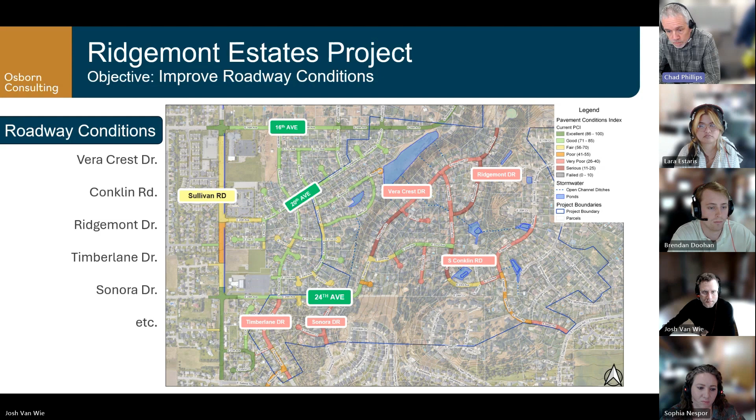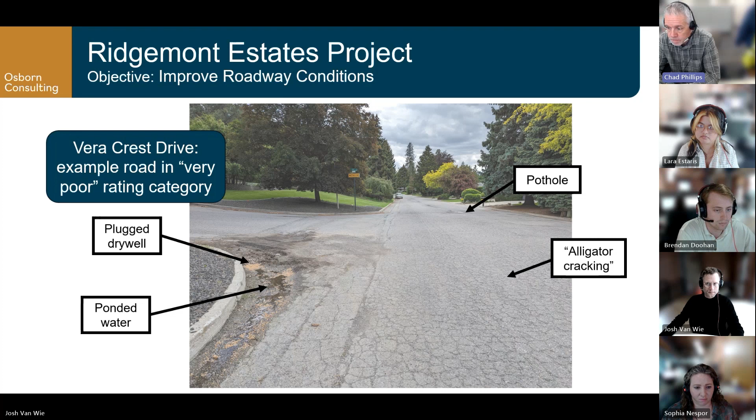So that was the project objective - that was in the past. We are now at the project study, and this is where we have brought in Osborn Consulting to help us out. In this stage of the project, we will be identifying those conditions that are resulting in the failing roadway conditions. Is our groundwater contributing to the roadway conditions? Probably. Is the existing stormwater system contributing to the failing roadway conditions? Maybe. So in the project study stage, we will be identifying existing site conditions.

We will be looking at a geotechnical evaluation to assess the groundwater conditions. We'll be doing public outreach similar to this, and more. We will be doing a hydraulic evaluation to assess the existing stormwater system. Ultimately, we will go through some design alternative development. This stage of the project started in 2023, is currently ongoing, and should be finished in the fall of 2024.

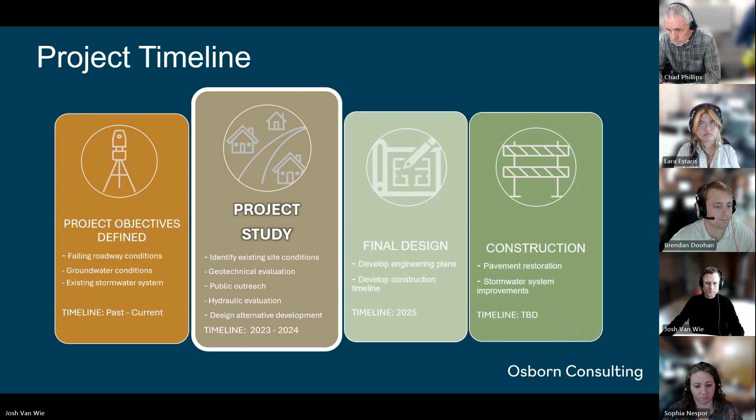Moving ahead in time will be the final design. The city will take the preferred design alternative developed during the project study and develop engineering plans and a construction timeline. Construction will then follow. The timeline for construction has not been determined and is dependent on city council approval and appropriate funding.

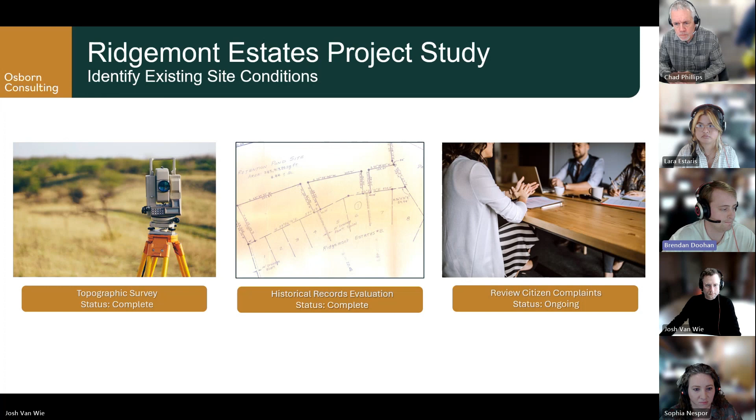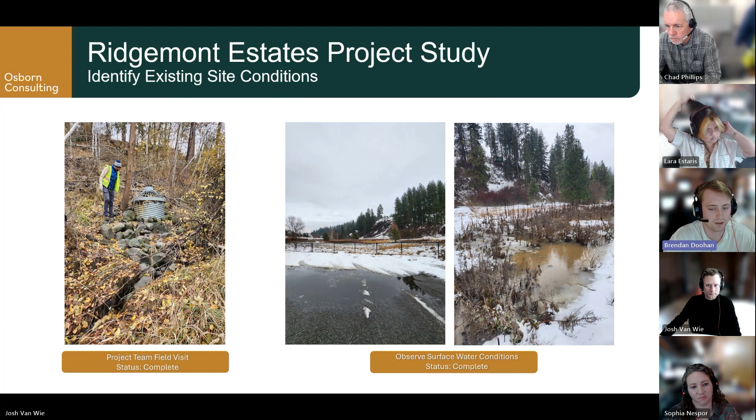Our project team has done a field visit. All parties involved in this project were able to walk the open channel ditches, infiltration ponds, and roadways to get an idea of how the existing system is functioning. We observed surface water conditions by inspecting roadways in the area, providing insight into where stormwater infrastructure may be failing. The team observed how surface water reacts during significant rain and snowfall events.

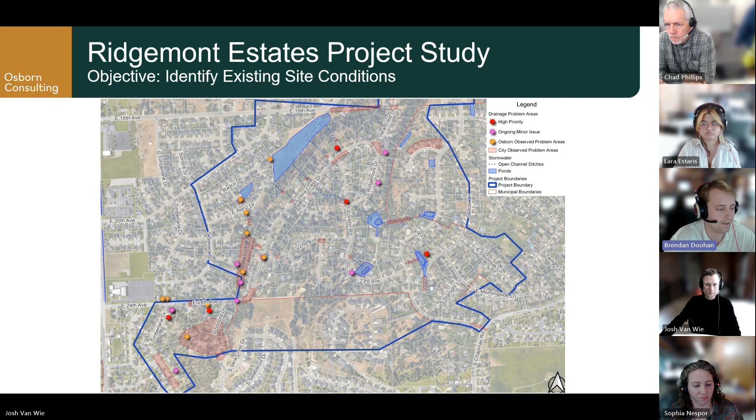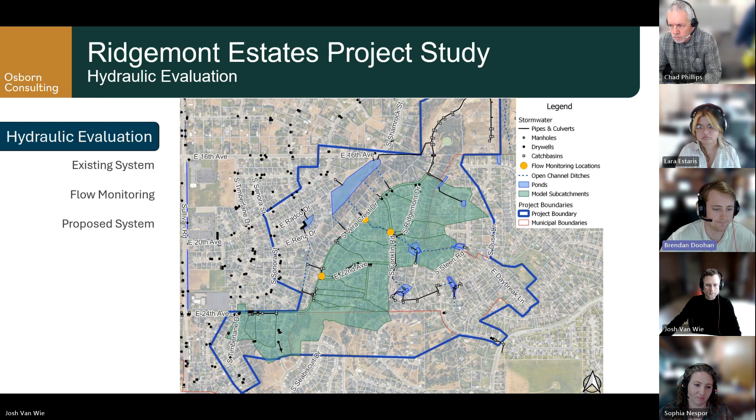We're currently observing the existing system throughout different seasons and storm events, documenting these with various pictures and photos to aid our decisions. The flow monitoring process is also ongoing. By measuring flow through critical drainage pipes, we can observe how various storm events impact flow conditions, helping us accurately size the proposed system. The proposed system design is where we start drafting alternative solutions to improve overall functionality and ensure the new roadway's lifespan. I'll hand it off to Sophia to talk about the geotechnical evaluation.

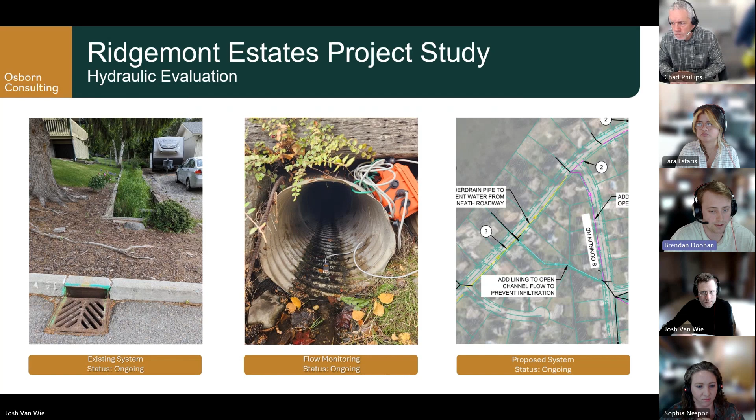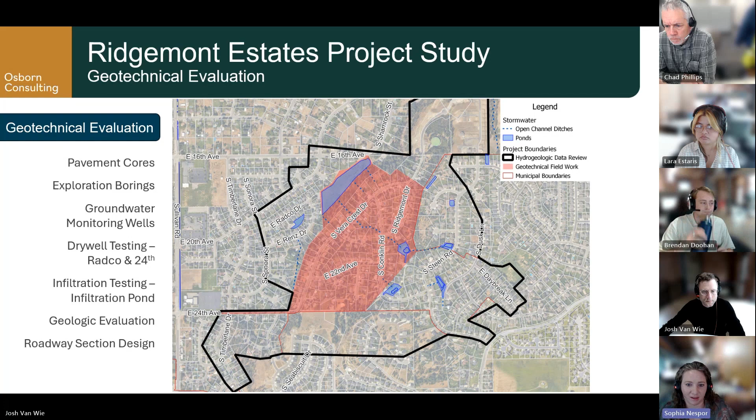Shallow pavement cores were drilled into the existing pavement to evaluate the pavement section and subgrade conditions. Engineers found that much of the pavement sections varied greatly in thickness, and some of the worst spots are in older parts of the roadway where the compacted subgrade and hot mix asphalt layer are very minimal.

Geoengineers have also installed monitoring wells at designated locations to record groundwater levels and temperature during storms and seasonal fluctuations in precipitation. Initial data shows that the groundwater elevation is consistently increasing in response to significant snowmelt events and rainfall events.

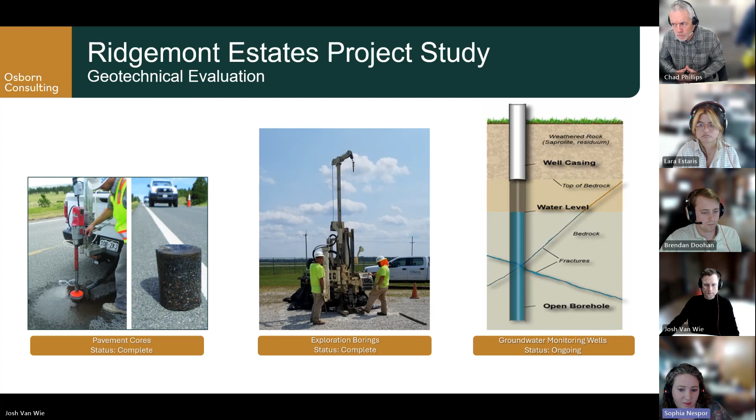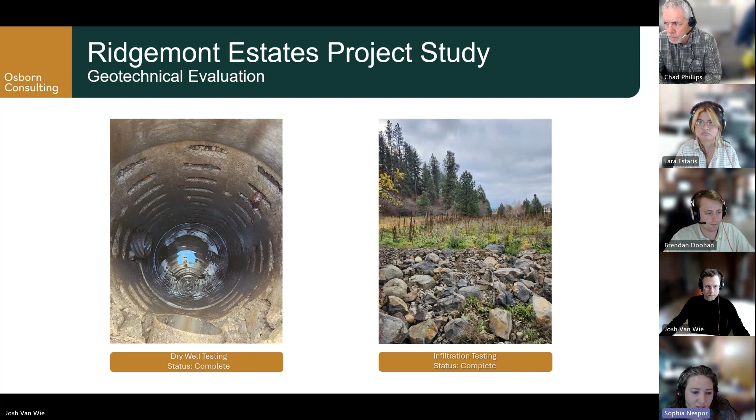Additionally, geoengineers has completed dry well testing and infiltration testing. The dry well testing was done around the Radco Pond and on 24th Avenue, and the infiltration testing was conducted at the large existing pond along 16th Avenue. These tests will help us determine if there's enough capacity in these existing facilities to reroute some of the stormwater away from the project's drainage problem areas.

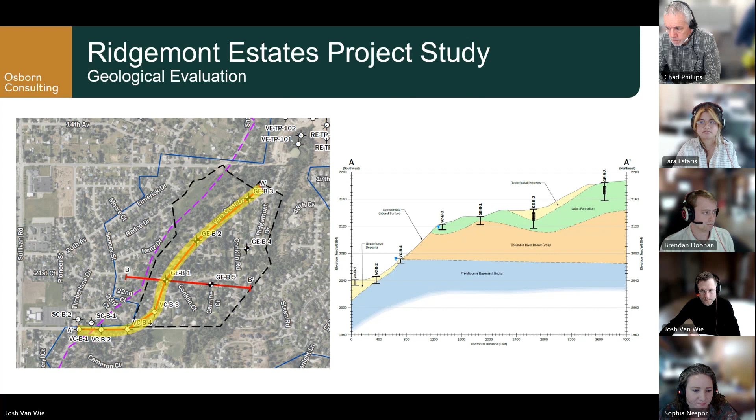I'll talk a little bit about the designs we're developing right now. We're still in the initial phase of developing concept designs. The process works like this: we'll come up with several designs that we think might be viable alternatives, work with the city to refine those, and then get to a point where we select a preferred alternative.

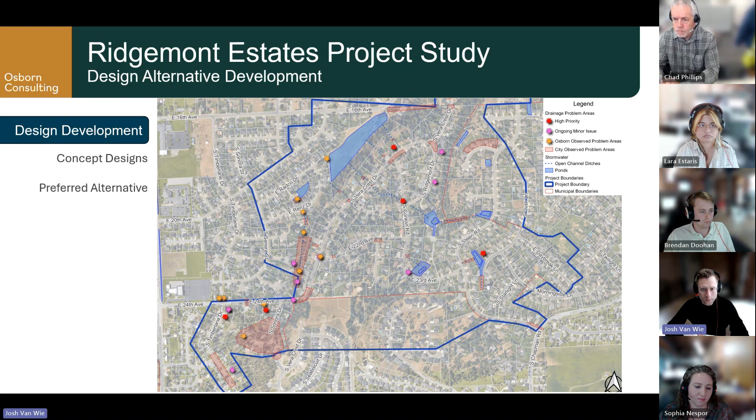For the concept designs, we currently have a few ideas that we're starting to work with. These are all in the initial phases, so these are not necessarily the designs that will move forward for the project.

We have some ideas of different ways to improve the roadway drainage system. We know there are some dry wells that have failed and some other drainage conveyance that's not working properly, so we're going to be looking at those.

There's also a number of open channels that go through the neighborhood, cutting between people's yards. Sometimes through someone's backyard, there will be an open drainage ditch that's conveying flow.

Those are areas where there can be a potential for interaction between the water flowing on the surface and the groundwater, either water seeping into the ground and filling up that bathtub, or water coming back out of the ground and causing extra water to go down through those channels. So that's a big part of what we're looking at.

We expect that there will be some type of new conveyance system, maybe some new storm drains that take flow from some of the problem areas and deliver it to areas with better permeability soils that can infiltrate that stormwater runoff.

Our schedule: we're getting into this alternatives analysis now, and it will be going through the summer, and then we hope by fall to have a preferred alternative selected.

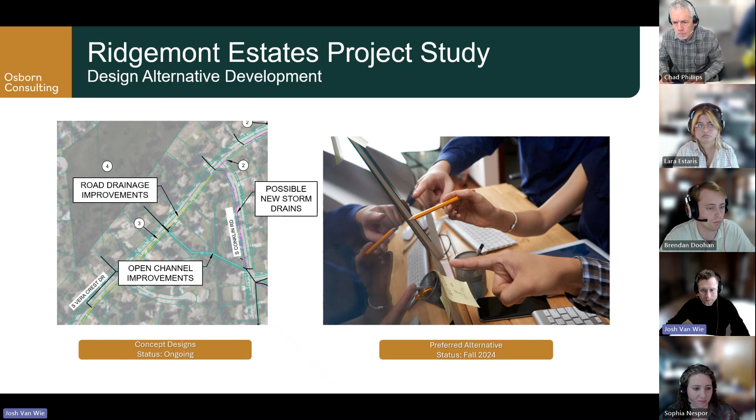Through this process, we would really welcome any feedback from the public, and we'll talk a little bit more about that on these next couple slides.

Public outreach has been another big part of the project. We want to engage the community and keep people involved that live in this area and use these roads. So to start that process, we developed a community involvement plan.

From that plan, we were able to develop a project website, which is live right now. You can go online and find basic information about the project, some maps, and we'll be posting project updates to that website. We also have a feedback survey and a mailing list that we'll talk about.

Part of our public outreach is to reach out directly to homeowners in the area by sending mailers. Many people have already received these, which went out at the beginning of the project. They give a general background on the project and some links pointing toward the project website.

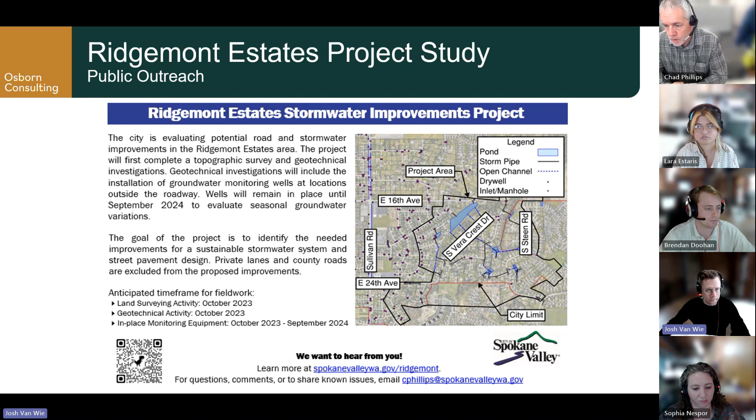The project website, like I mentioned, is live online, so we would definitely encourage people to go on there. This is what it looks like here - there are some maps and information available.

We're also interested in collecting people's information if they're interested in receiving updates directly. You can enter your name and email address on the project website and sign up for a mailing list that will send updates throughout the project.

We also have a feedback survey posted on the project website. It's a pretty short survey asking for any feedback about the neighborhood and any drainage and roadway issues. You can navigate to the website, click on the survey, and fill it out - it should probably only take 5 or 10 minutes.

We would really love to hear feedback from people. The information that we collect here will just go towards supporting this project - it's not information that will be shared publicly in any way.